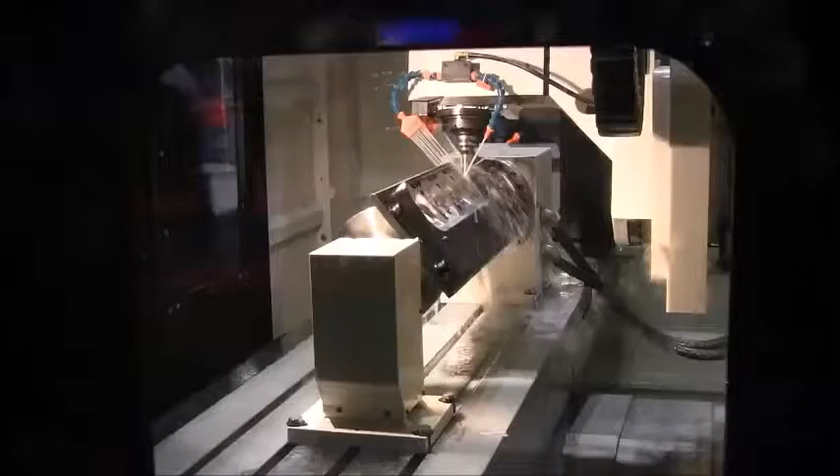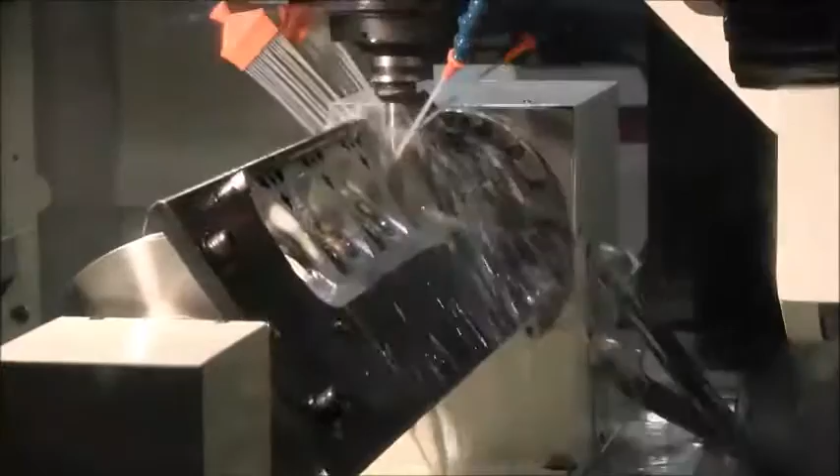The Rottler P69 is the world's most advanced 5-axis cylinder head porting machine, producing the fastest cycle times and most accurate ports in the industry. Utilizing our easy-to-learn software, no other solution can go from a hand-ported head to a fully CNC-ported head faster. Let's go through the steps to program a head and get it into production.

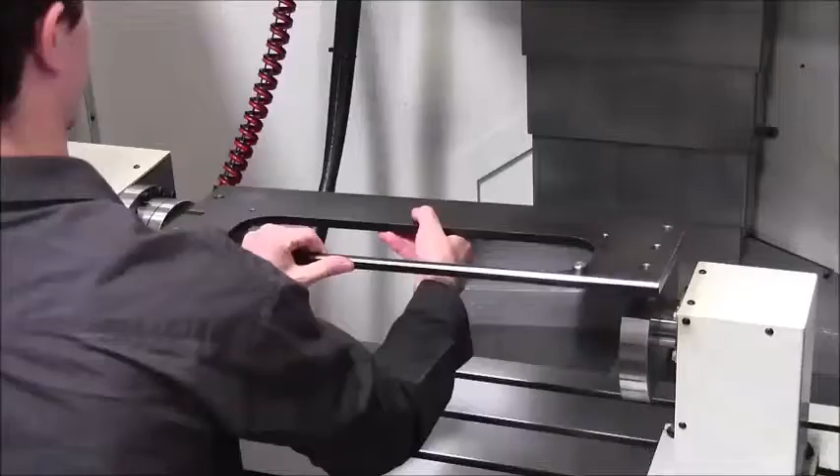The first step is setup. This is easy. Just put the fixture on the machine and set zeros. Then put the cylinder head on the fixture. Notice both the fixture and the cylinder head are on pins. This means nothing will move on you once it's all bolted down.

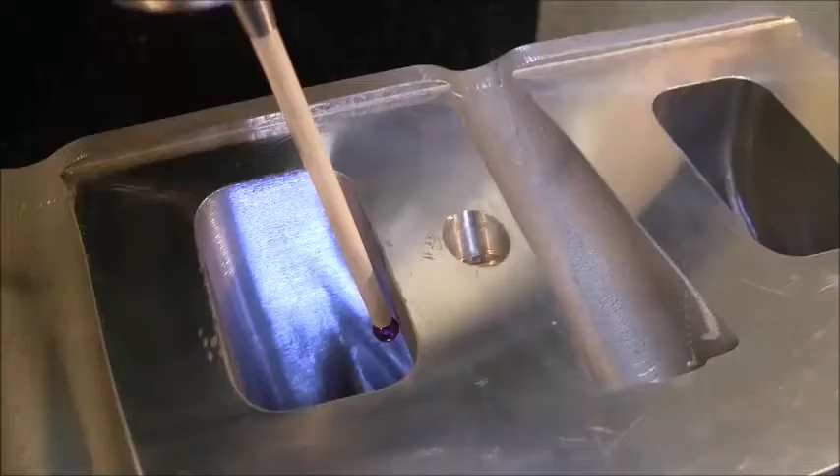Then comes digitizing. This is the P69's claim to fame. Combining the industry standard Renishaw probe and P69 digitizing software, the only input required is a 3-point plane on the entrance of the port and the exit of the port. Then you just tell the machine how many slices you want through the port and start probing. No other solution on the market is as simple. This process takes between 15 and 45 minutes depending on the size of your port.

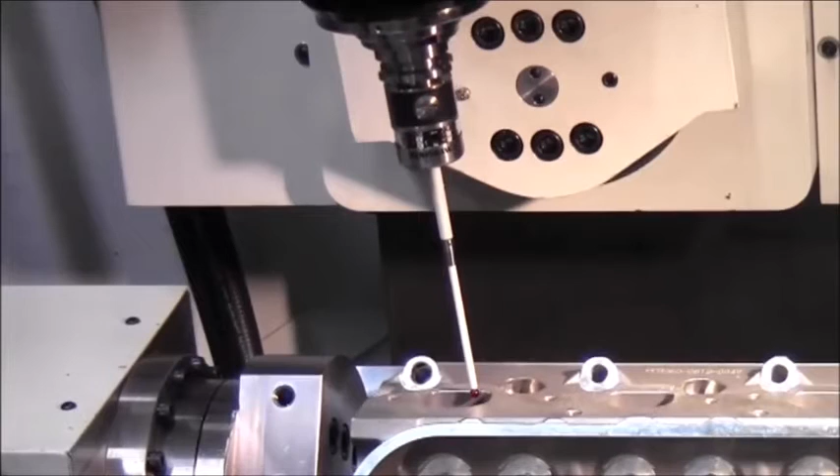Notice how our software digitizes in 5-axis. This means the shank of the probe will not touch the wall of the port, which eliminates manual cleaning of the data before creating a surface.

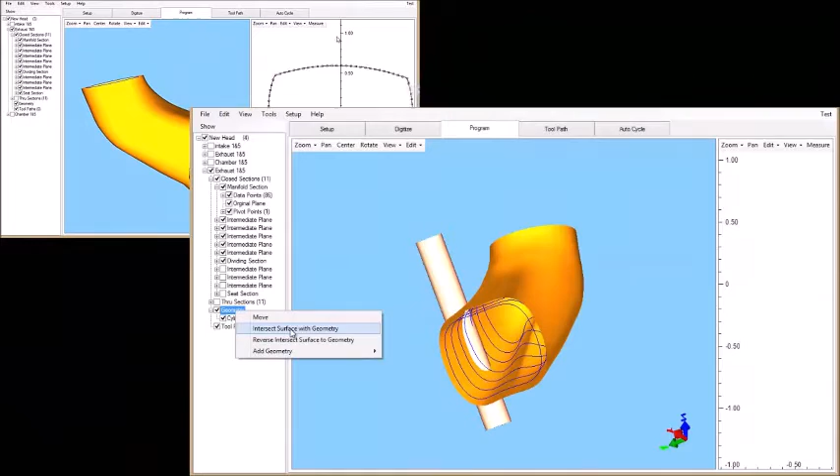Next, you can let your imagination run wild by making any changes you want to your port. For instance, you can add a D shape to any part of the port you want. You can even insert cylinders to represent a bolt hole, then tell the software to leave a programmed amount of material between the bolt hole and the port. You can even create an arc through your short turn and snap the 3D solid right to the radius.

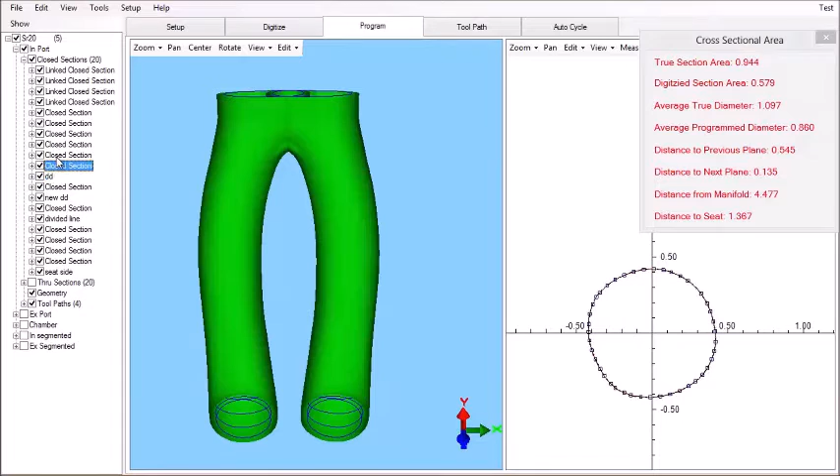Or you can raise the runner by a programmed amount. Skew the ports from side to side. All of these features and many more can be done in seconds. As you're making these changes to your port, you can also look at the cross-sectional area of any of the slices through the port. You can also right-click and get the volume of the port.

After you have made any desired changes to your port, you enter which tool number you want to use and your desired toolpath step over. The software will then automatically calculate tool angles, which you can then view by moving your mouse over any area of the port. Then you just press cycle start and sit back and watch the machine port your head.

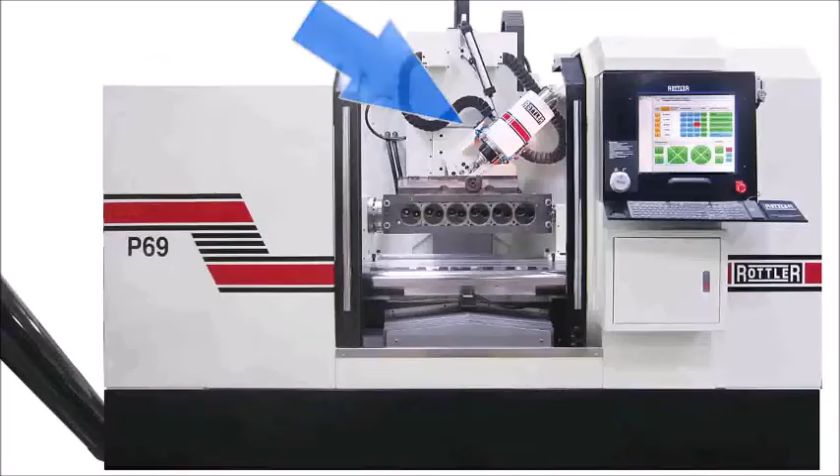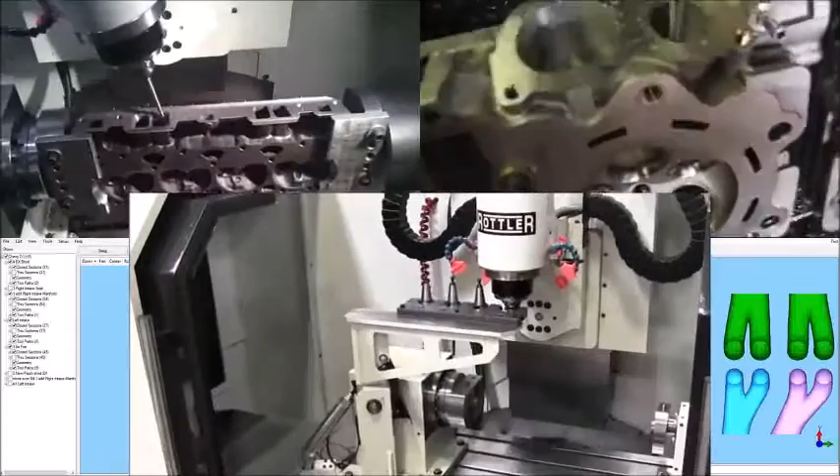Because of our tilting B-axis design, the Rottler P69 will port any head that fits on the machine. From small 5-valve motorcycle heads and hard-to-reach heads like Subaru and Duramax, to big V8s and inline 6-cylinder heads. We can do cast iron. We can also provide custom fixtures for specialized projects such as high-volume production. And with our simple, cost-effective automatic tool changer, you can leave the machine running completely unattended. We really do it all.

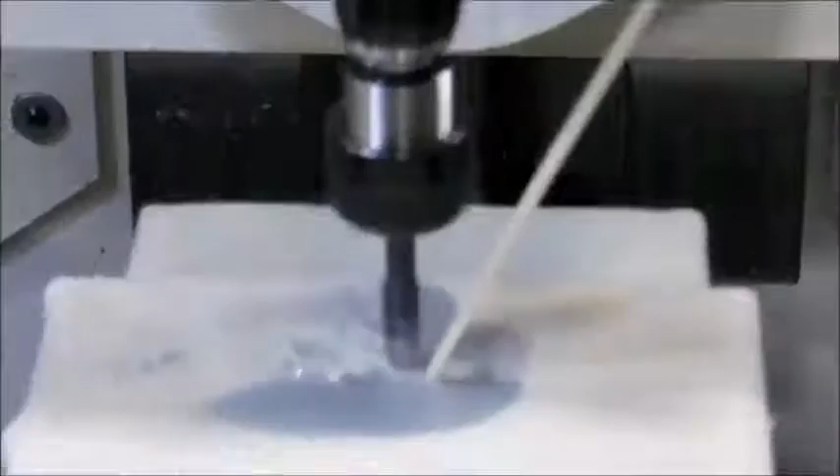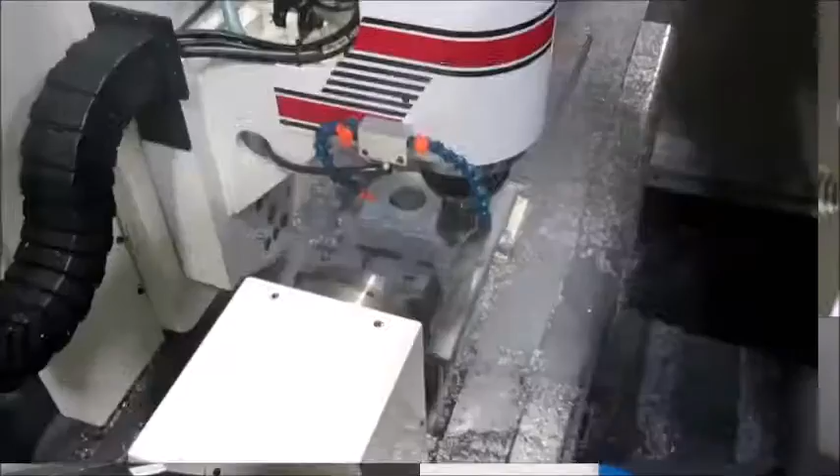The P69 can perform many non-porting machining operations using Rottler CAM right on the machine. From simple operations like drilling and tapping, to engraving on the side of the head without refixturing the head. We can also use an 8-inch fly cutter to surface heads. The P69 can perform all operations to machine a head from a raw casting: shell mill surfacing, seat pocket machining, head bolt and guide hole machining, and heavy roughing.

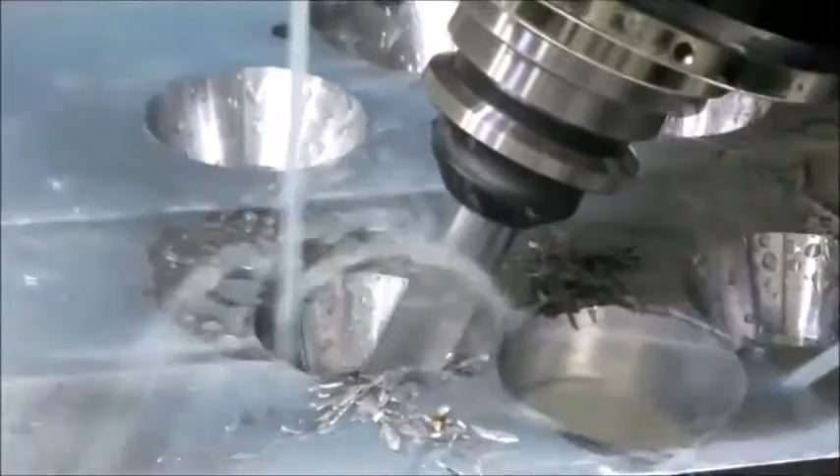The 5-axis capacity can be utilized easily by turning on a draft angle. This interpolates the 4th and 5th axis to maintain a constant draft angle that is perpendicular to the toolpath movement, as you can see in this circle with a 30-degree draft angle. All of these operations and many more are programmed right on the machine using Rottler Cam with no outside CAD/CAM software. This means no G-code knowledge is required.

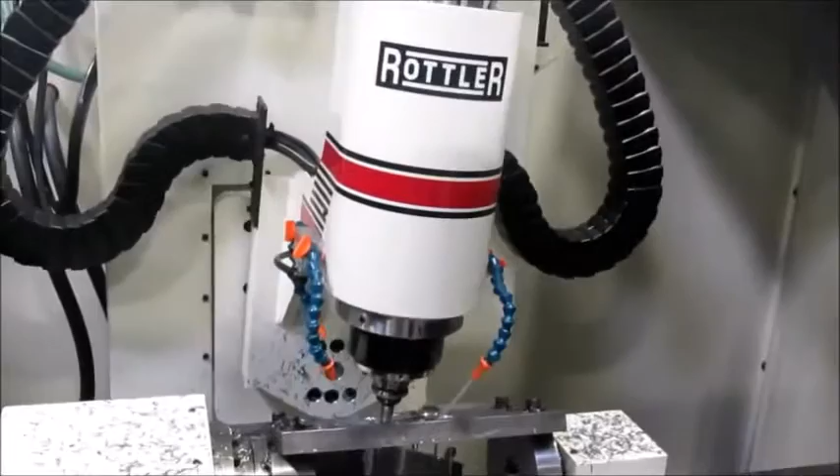One of the P69's most valuable capabilities is our patent-pending dimpling software, producing the golf ball effect in any port. Using our dimpling feature, many companies have proven an increase in horsepower, like Tracy Dennis of Sunset Racing, who just purchased his second machine.

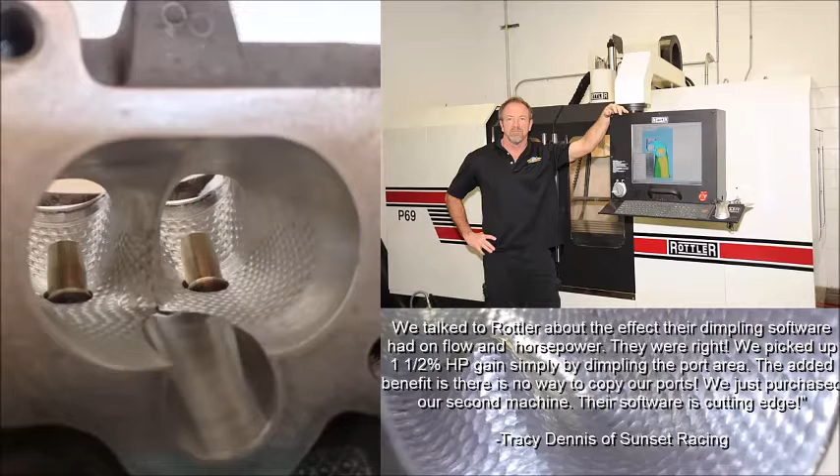Rottler has invested in modern internet support systems. Our entire head porting training is online in video format, accessible from the machine. While we do include 5 days of training with every P69, our training videos are so detailed that we've had companies learn 100% from the video library.

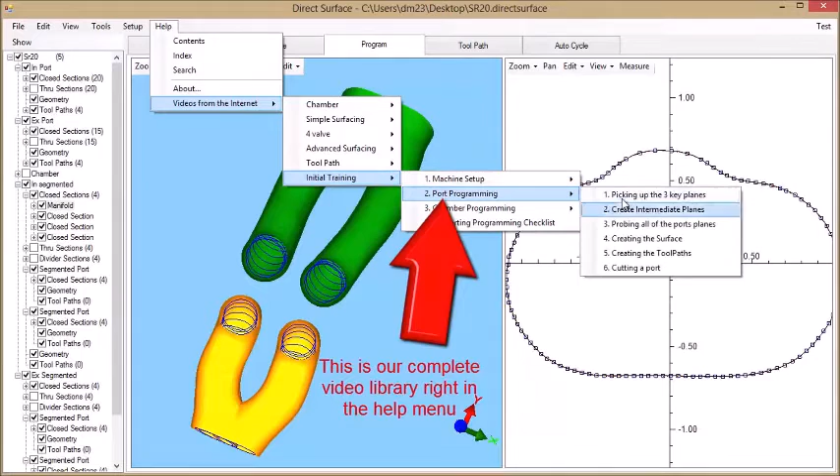A Rottler tech can also log in remotely using modern internet tools such as LogMeIn and Skype to help customers optimize the use of their machine. We can log in a matter of seconds and operate every aspect of the machine as if we were right there in your shop. Technology is amazing, and our Windows-based control allows Rottler customers to benefit from these advances in technology.

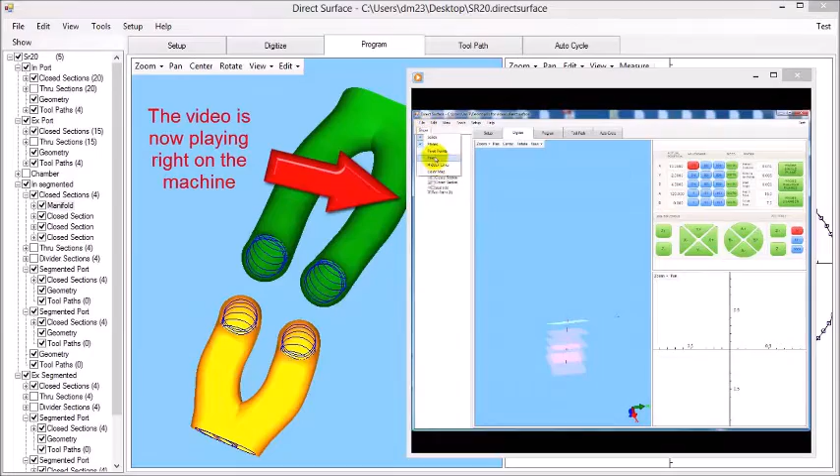Just ask Tim from NG Motorsports, who we have mainly supported over the internet a half a world away in Germany. Tim is one of only a few people that has experience using the competition system and our system. Tim decided not to purchase another machine from the competition, but instead to purchase a P69. According to him, the machine choice is obvious.

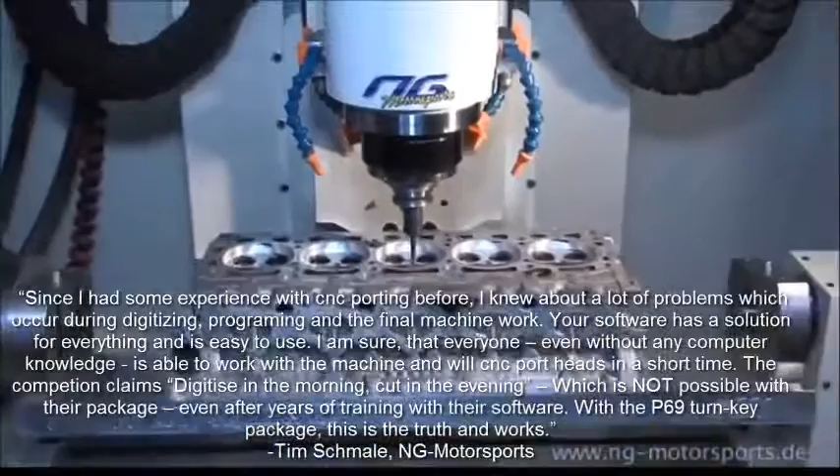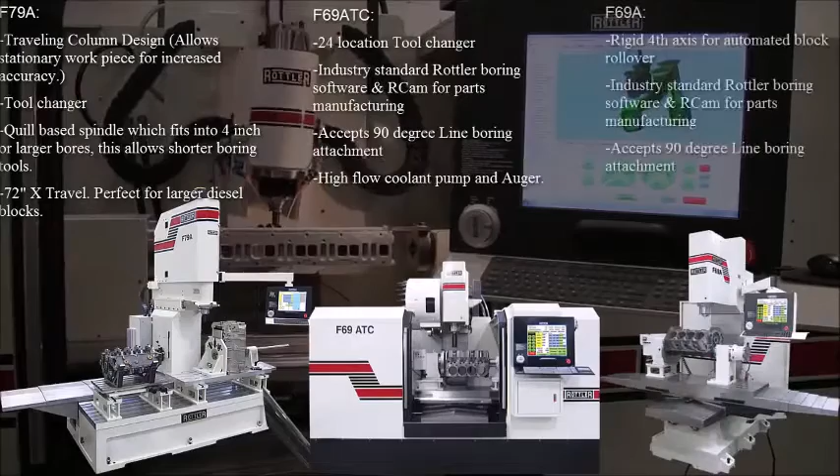Depending on options, the recently discounted P69 is priced in the mid to high 100,000 range. We believe a single-purpose machine is more cost-effective than a machine which claims to do both heads and blocks. Shops that combine a P69 with a rigid block machine will outperform any shop that invests in one machine which claims to do both heads and blocks.

The combined cost of our two machines is in the same ballpark as our competitor's single machine, and this incremental purchasing gives shops the flexibility to run heads and blocks simultaneously, doubling your shop's capacity. Simply put, two machines are better than one.

Rottler Manufacturing is the world's largest and most diverse engine building machinery manufacturer. Founded in 1923, Rottler has constantly focused on the cutting-edge developments in technology. In our 50,000 square foot facility located in Kent, Washington, we design, manufacture, and assemble our machines right in the USA. Let's do a quick factory tour.

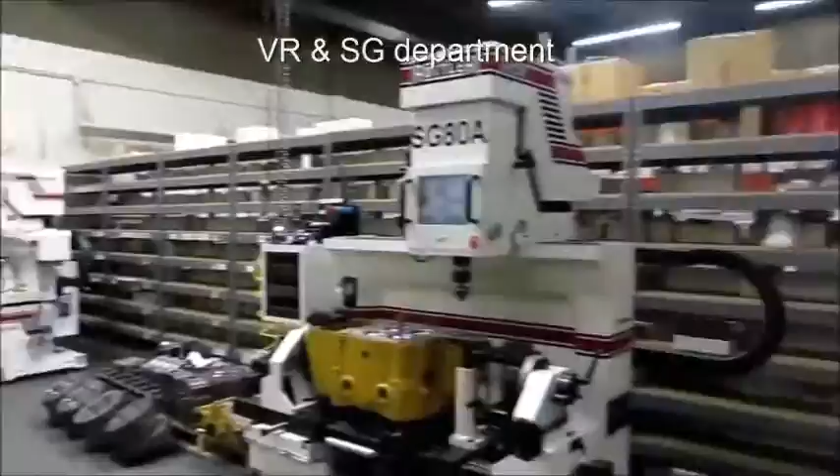Our first stop is the Diamond Hone Department, with multiple configurations for a variety of cylinder lengths and diameters. Then, right down the hall, we have our valve refacing and seat and guide department with manual and automatic versions to accommodate a variety of sizes and configurations of heads.

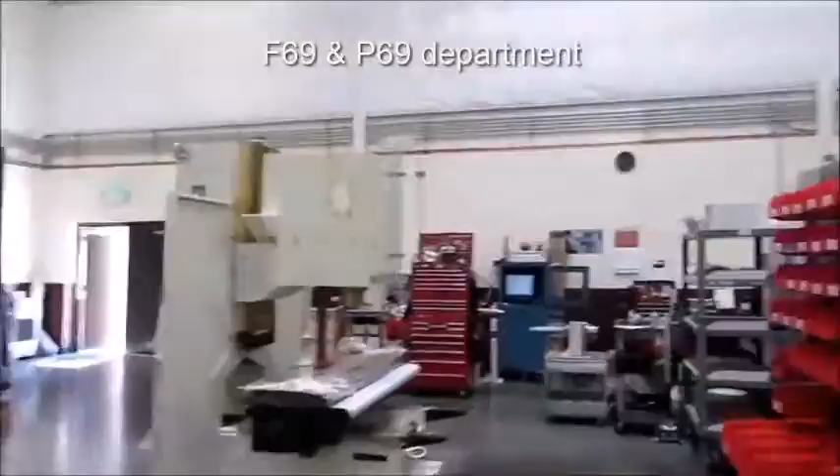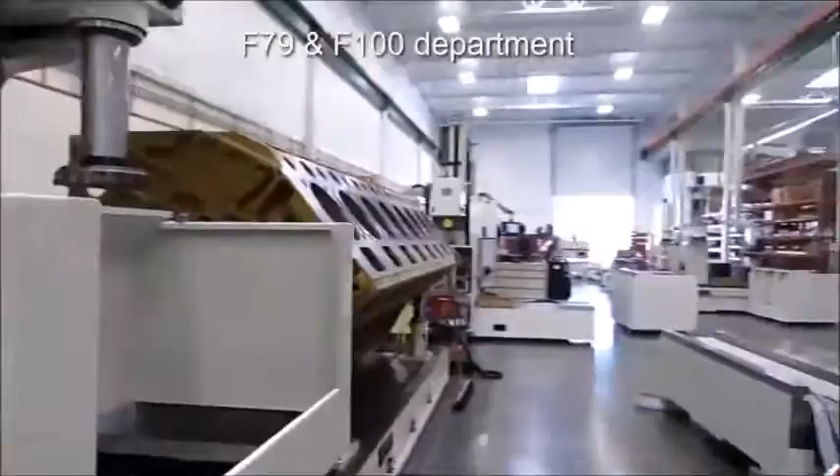And in our recently added 25,000 square foot assembly plant is where we assemble all of our surfacing machines and our smaller F-Series boring machines with the recently upgraded Windows control. And in the back of the factory is where we assemble our CNC product line, such as F69A, F69ATC, and P69. Then we move on to the really big machines like the F79 and F100 machines, which are designed for the large industrial market.

And finally, our machine shop, where all of our high tolerance critical parts are manufactured. Many of our parts are machined on our own F69 ATC shop machine. That's right, we put our own machines to work manufacturing parts for production machines.